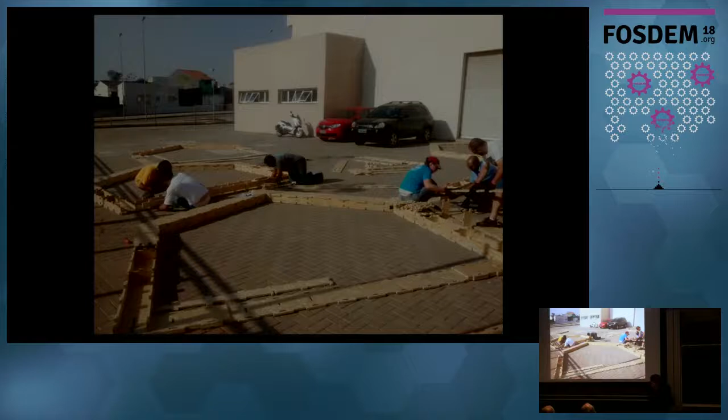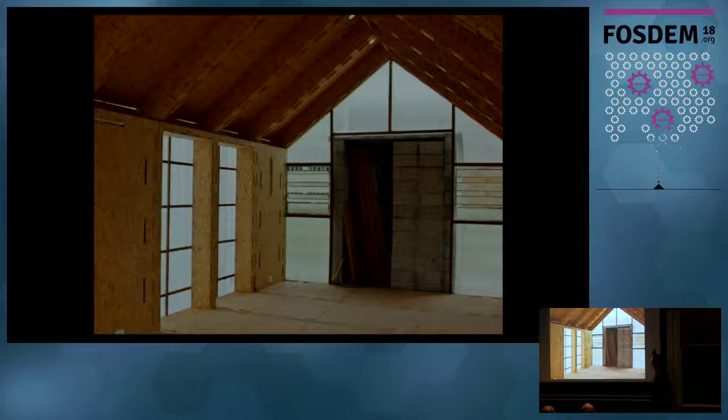This is how it started being built. You begin to build those structures that you see here on the ground, then you put them up, and then you put the parts that bind them together. I will explain all that a little bit later on.

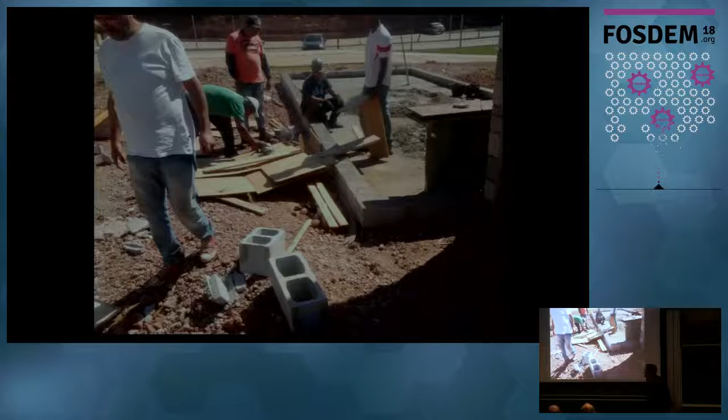So we begin to build like that. This is the base wall that we didn't build ourselves, we just hired a constructor to build these parts that are more traditional construction. That was also one part of the experiment, to have a mixed system with a part built by professional builders and one part built with volunteers, and see how that could work together, how the experience of one could help the other.

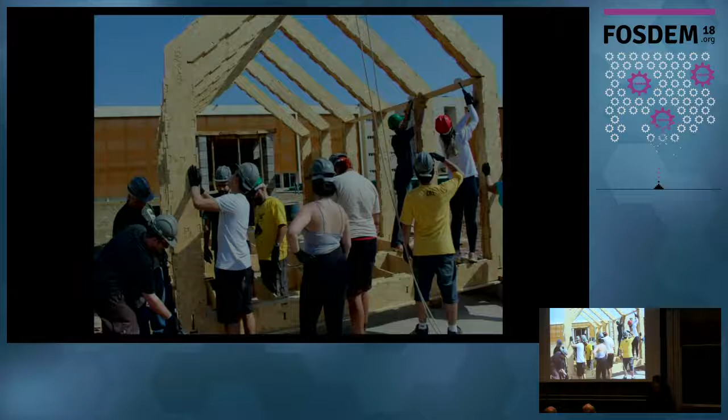And that's the actual building, with everybody hammering crazily. That's really the big part of it. If you look at the result, it's not so impressive, it's just a little house. But the process of it, everybody there who built this thing went out saying, this is the best experience of my life, I actually built a house.

The whole point of the thing is actually to be able to build your own thing. Not so much that the result is so impressive or special, but the fact that you are able to do it with no knowledge at all. Everybody who was there came without any experience, and after 1 hour you are professional. You understood the whole system, and you can teach others how it works because you know it by heart.

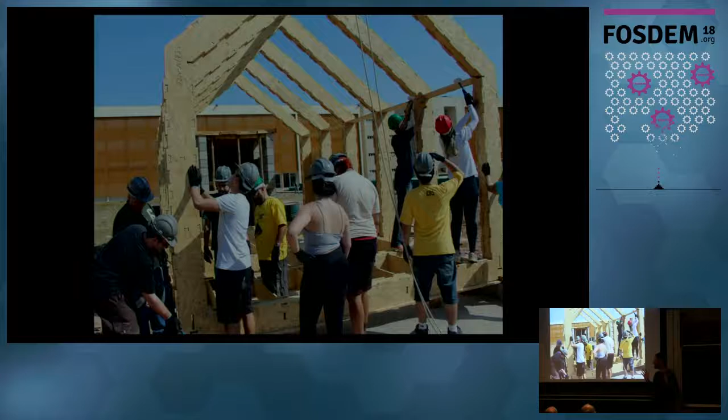Most WikiHouse-based projects - I will explain a bit more about WikiHouse afterwards - most existing WikiHouse projects have been built inside an exhibition, for example, temporary things that were dismounted after 1 or 2 weeks. Now there are like 3 or 4, I think, built to last in the whole world. So this is still experimental, we don't know how long it will hold, but we try to do our best to make it last many years.

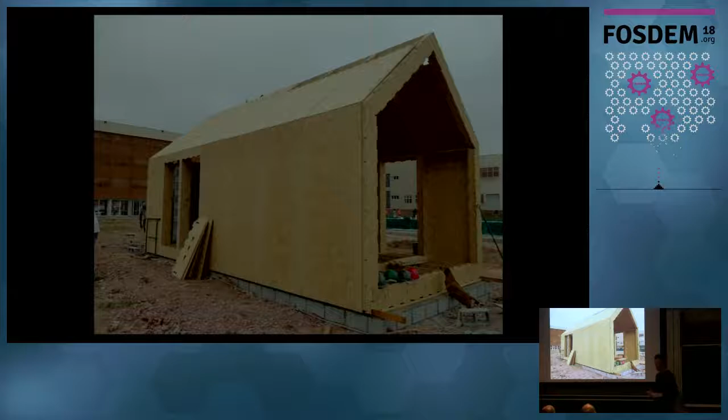So we did a bit more than just - that was a big problem. The construction was slow, we had to protect it from the rain, and we didn't think well about that.

That was one of the biggest problems we met. Since we are in Brazil, we have a very soft climate. Basically, you never have to protect against cold or heat, because we're in the southern part of Brazil where it's never too hot and never too cold. So basically, you can forget about insulation.

I will show afterwards what they used to do in Europe, because the WikiHouse project is from Europe. So they have to be really careful about insulation and not letting any cold or humidity enter, because humidity is terrible for the wood. It cannot take water, otherwise it begins to rot and change shape, and that's terrible.

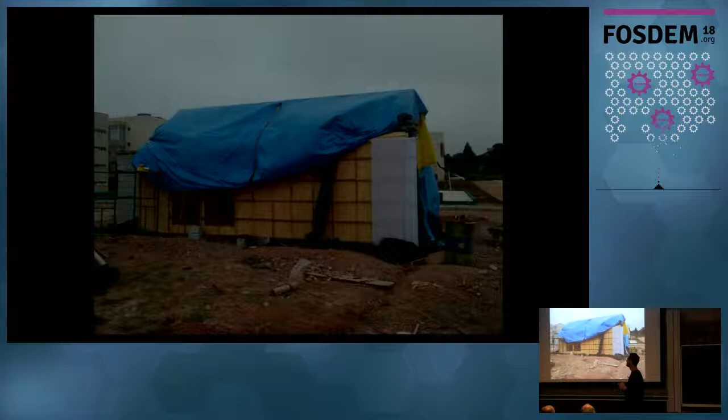But in Brazil we don't have so much of a problem, because the air helps us instead of being an enemy. So instead of cladding it inside a skin, we decided to let it breathe. We use this material, and left a space between it and the wood, so the air could flow all the time, entering below and escaping on top, keeping the wood dry all the time.

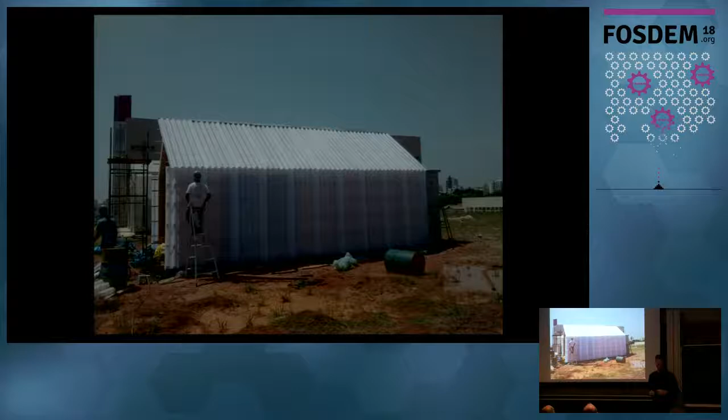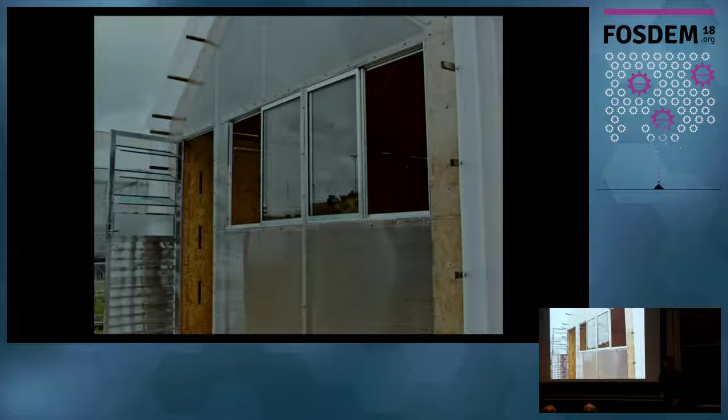This is working quite well, actually. It's all open on the sides, and the air can flow between all the parts of the structure, because we don't have to care much about being tight there—that's not important. If a bit of air gets in, nobody cares. It's even better. So we have a completely different situation than in Europe, and we were able to experiment with these quite interesting air circulation systems. This is the inside.

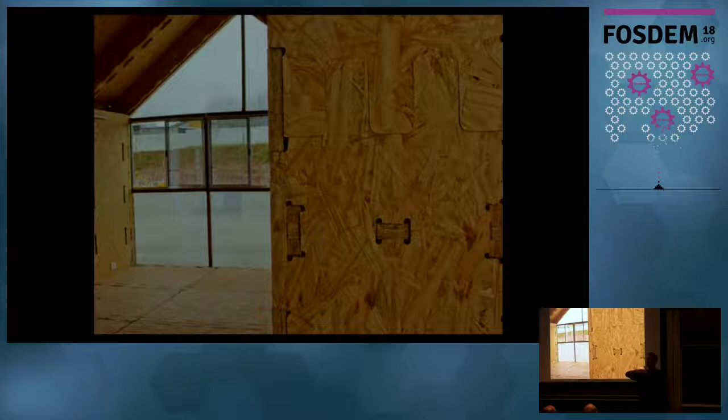You see the details of how the joints are made, and they are really tight. That's the advantage of having this wood cut by a machine—the precision is absolute. You can dimension these things to be just tight enough that you need a hammer to put them in, and once they're in, they're very strong. We did a bit of testing to adjust the calibration of the machine, but the first test was okay, because the precision is built in.

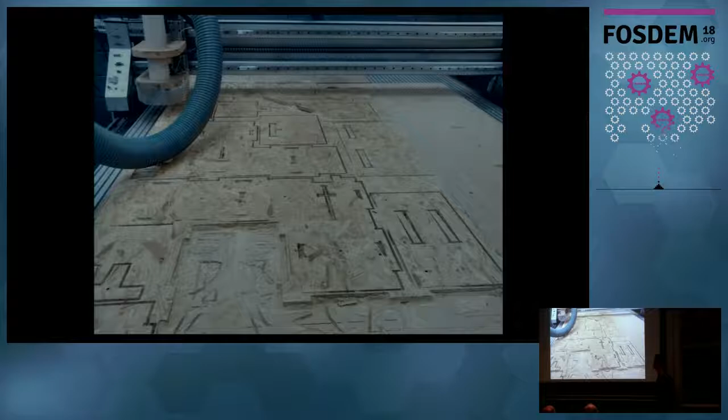So this is what the machine does. It basically comes from your model. That's where FreeCAD enters, which I'll explain now. Basically, your FreeCAD file goes to the machine, more or less. The process is quite straightforward.

And this is the pieces being cut. It's quite a lot of wood. This whole house is like 170 pieces of wood—like 2 piles that size. When it begins to accumulate like that, you really have a problem figuring out where to put them before you use them.

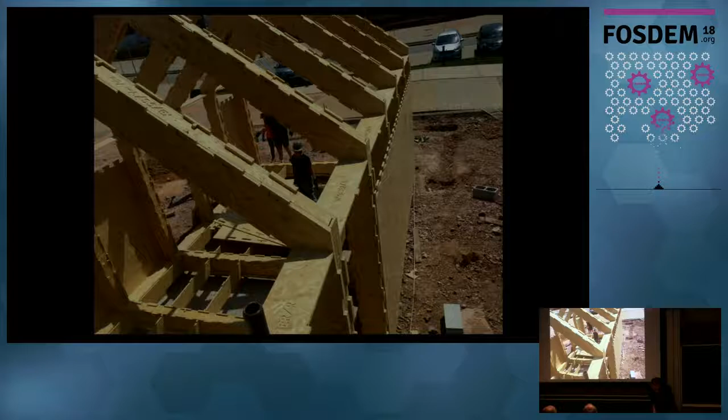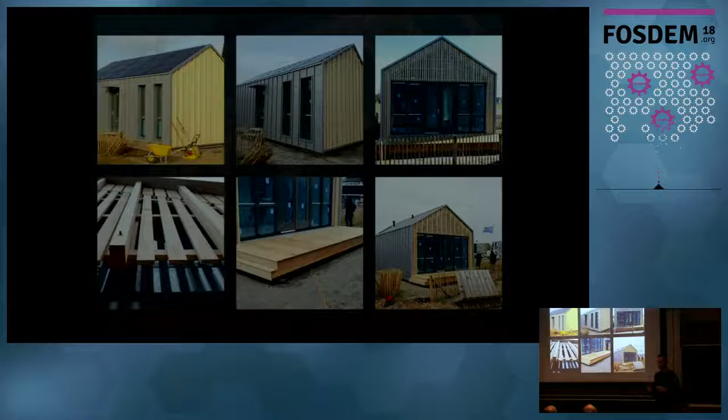A little bit to show you the details—this is another WikiHouse they've been building. They're finishing right now in Almere, near Amsterdam. There was a bit of competition about who would finish first, and we won. But ours is much easier, so that's why we won—we don't have half the complexity they had to cope with here. But if you see, it's exactly the same system, the same shape, and the same problem.

So this is the WikiHouse project that we took our shape and system from. This system was begun in 2011 by two architects in the United Kingdom. They built, I think, above 30 or 40 around the whole world, but those still standing in use—there must be about 4 or 5 now, 2 or 3 in the UK. Now we have one in Brazil, and there's this one in Almere.

It's fully open source. You can just take their files and adapt them like if it was code. It's 3D models and the whole system of how you build it. They have manuals as well, and a lot of resources outside just the files—which are files too, but you understood me.

And it's now well tested. The first ones had lots of defects in how the joints would work, and the whole thing would shift like that. Over the years, a lot of people worked on this, even pretty famous engineers, and the system is now extremely solid.

These columns, as we call them, the main structures, are really impressive once you begin to build them—the more you have, like 3, 4, 5 pieces crossing each other. After 5 pieces are there, it's extremely solid. Everybody looks at that, and you can really hang a lot of weight on them. It's a heavy construction, so it has a lot of stability. You feel that it has matured, and it's become something you can really trust.

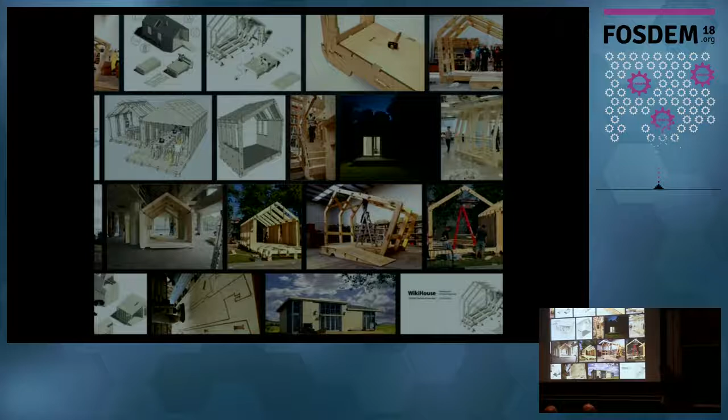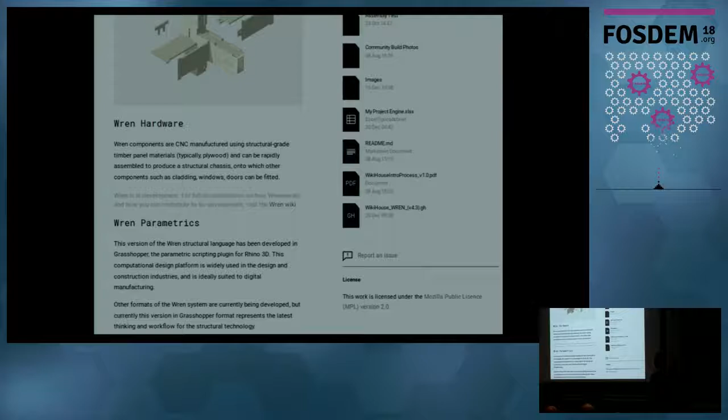That's the kind of stuff you find on the WikiHouse website. You grab their files—all the old ones are based on Sketchup. Those are Sketchup files, but they're now migrating to some scripting system for Rhino, so you could enter the parameters and it would build the 3D model automatically for you. Of course, we try to port that to FreeCAD. That's what's coming now—that's the kind of material you find there.

That's what we used basically without modifying anything, because we didn't want to try anything fancy—we took their base system and tried to do it well. Next time we'll experiment with some stuff, but we really tried to do it the best way we could, so we tried not to modify anything from it. It's basically modular—you make it as long as you want, it's just repetition of modules.

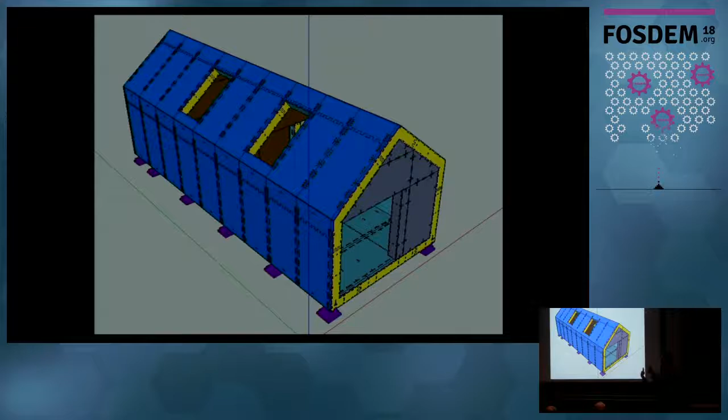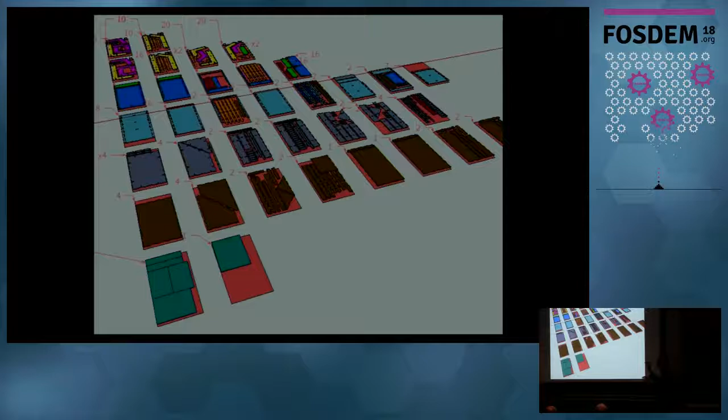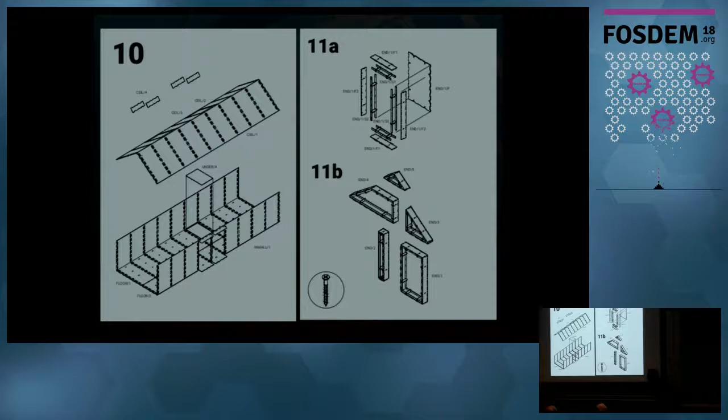In the WikiHouse files, you also find them already separated to be processed into CNC files, G-code files to be used by the CNC machine. So this is all already set up, but we redid that part as well. And then you have mounting manuals—you see that they say you could use some screws.

And so this is FreeCAD. This is the project I've been participating in since it started in 2002. I've been there since 2008, I think.

Yeah, FreeCAD, for who doesn't know it, is basically a 3D modeler, an open source 3D modeler. It's GPL licensed, and its main focus is that it's a technical modeling application. Basically, we used to say it's used to model things that you will build in the real world afterwards—from electronic components to cities, basically. Anything you would need to build afterwards, requiring precise and controlled modeling that you could do and redo. It's generic because, as I was saying, it's multi-purpose. It's used for any kind of stuff, not specially for buildings or for this or for that.

A bit like who knew AutoCAD—that was its strength. AutoCAD was something everybody used: engineers, hobbyists, architects, everybody would use the same software. And that's something that has been lost in the commercial world because they want to specialize, because they want to sell specific solutions for each profession. We like to go back to the old good times with FreeCAD and try to have a kind of application that's just a big generic thing that waits for your creativity to work on it.

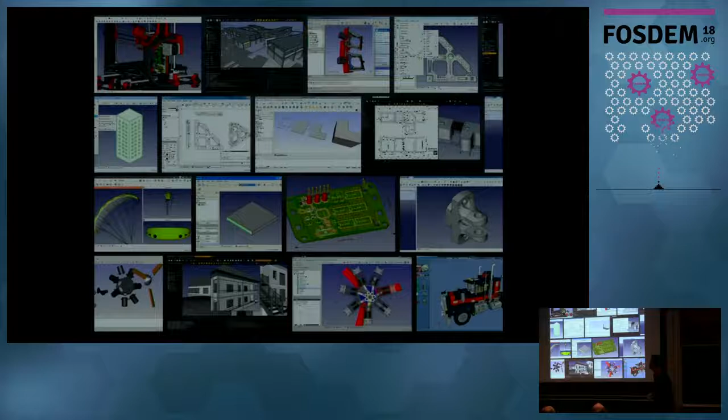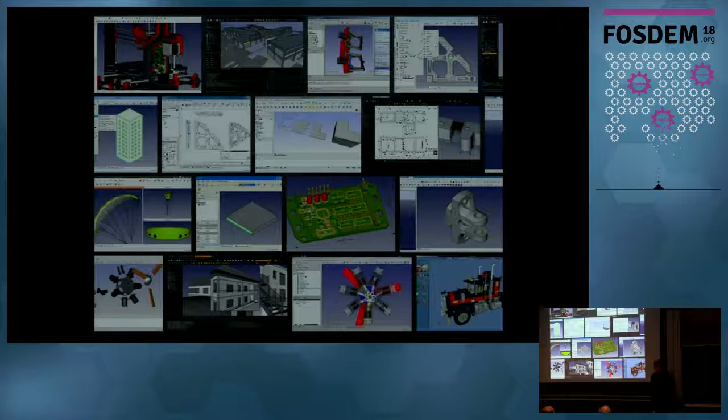And that's the website of FreeCAD. That's FreeCAD basically—for who doesn't know it, it's a pretty common application, like a very standard Qt-based interface with a 3D view and modeling tools. The interface has nothing special. That's the kind of stuff that people do with FreeCAD.

Where is Juan? Here. He did it. This one.

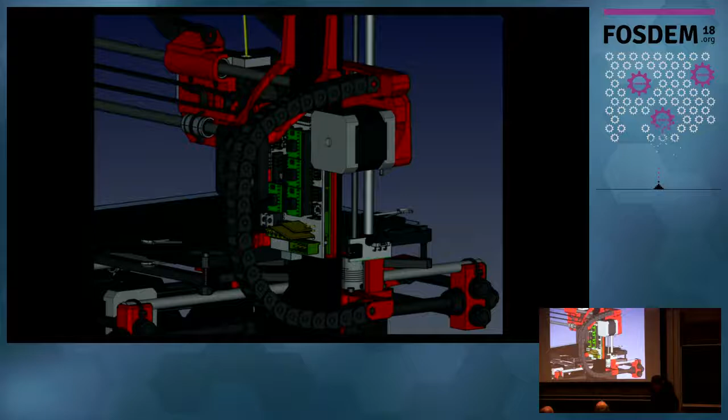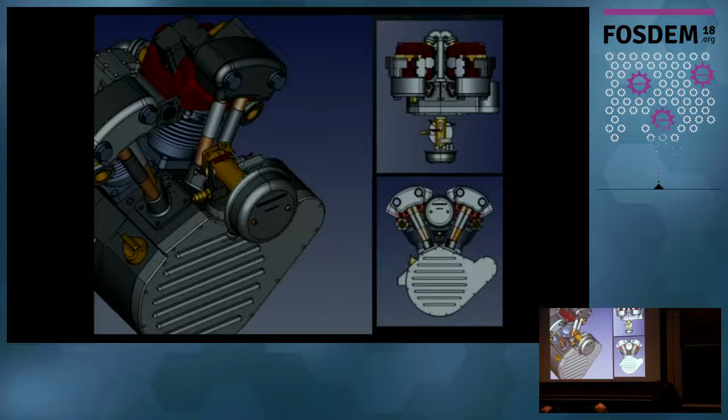That's one of the last ones that appeared on the forum. Yeah, people do kind of crazy stuff with it, and more, and houses as well.

One of the first things we did with this project is convert the SketchUp stuff to FreeCAD. One of the main differences is that SketchUp is based on mesh geometry, which is basically points and triangles. Everything is made of points and triangles.

In FreeCAD, we use BREP geometry, which is basically surfaces. BREP means boundary representation - it means the objects are defined by their boundary surfaces, and these surfaces are basically NURBS surfaces.

Every edge of the surface is a mathematical curve, so you can basically do anything that could be a curve. That means you have extreme control over exactly where your surfaces pass through.

It's a bit the same analogy as bitmap and vector graphics. In vector graphics, you have mathematical definitions of where the points are - if you zoom closer, you still see a perfect line. In bitmap graphics, there are pixels, and if you zoom very close, you see the pixels. It's the same thing.

Mesh geometry is faceted - you already have the location of the points. With BREP geometry, we can recalculate the triangulation anytime, so you don't have any fixed resolution in it.

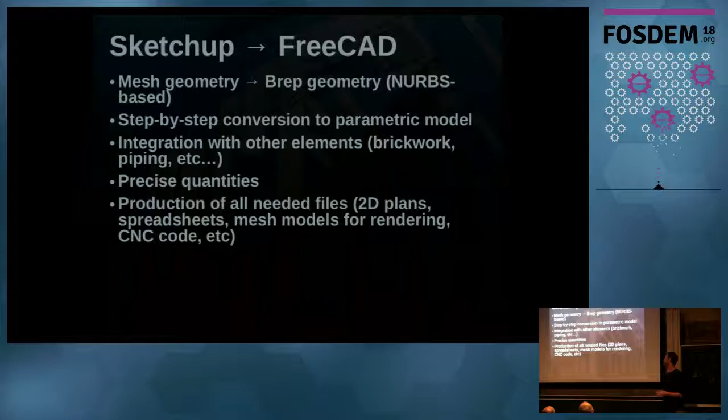That's what we did. Then we had all the integration with other stuff that's not the WikiHouse. And then the fun began - you begin to be able to produce a lot of interesting stuff from your files.

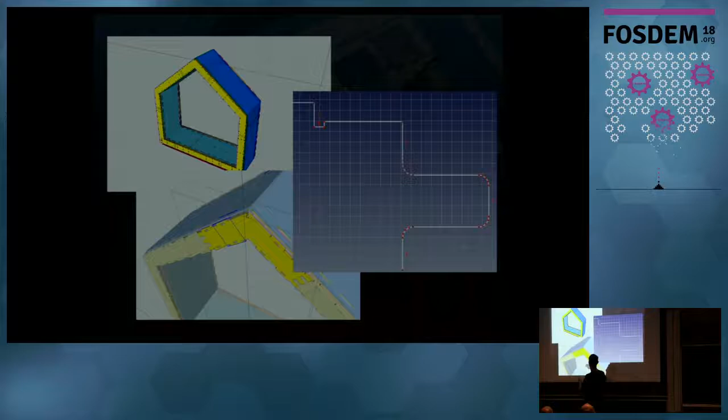So that's basically what happens. You take these SketchUp models, which are like dumb objects, and extract the contour of these shapes, and they become parametric in FreeCAD. You can put dimensions on these and say this must be 20 millimeters, and then you have a parameter - afterwards you can change that to 30 if you want, and you don't need to redraw the shape, it just goes for it.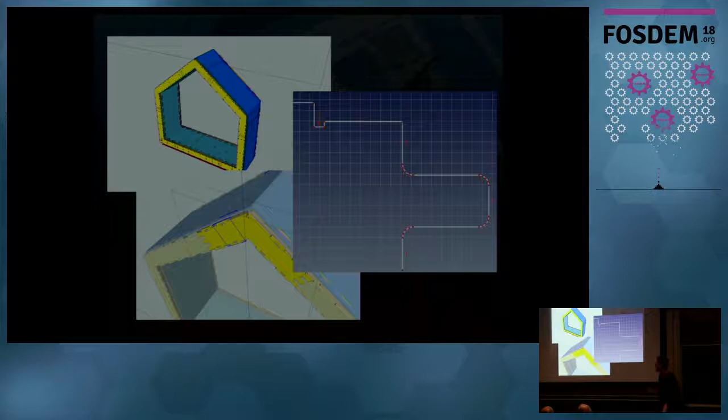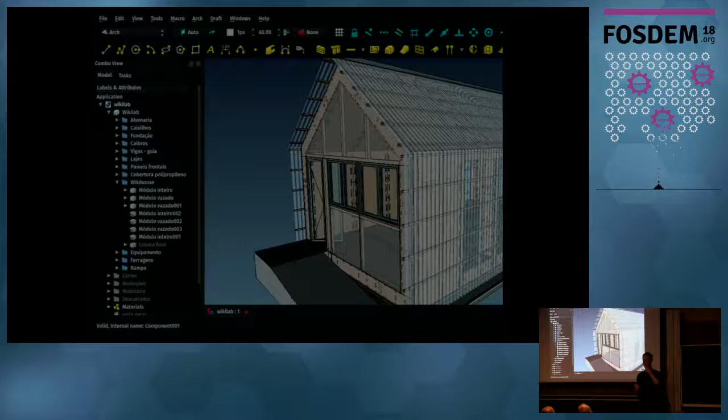All this is really step-by-step work that you don't need to do at once, and you can refine it over time. This is the finished model in FreeCAD with all the rest - it's not only the WikiHouse. One of the good things is that you can organize things really well the way you want, grouping objects by type. Of course it's in Portuguese, but just to get the idea that you can go into pretty complex models and keep something that's really easy for a human to understand how it's organized. That's one of the big points, I think.

This is when you remove the stuff on top of it. It's really the wooden construction, the inside, and all the piping is there. Everything is in the model, basically.

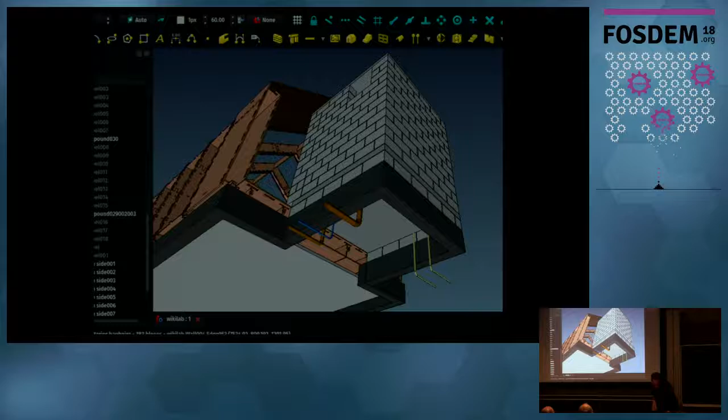It's pretty complete. So we had this model of the whole building, and we had another model that's just one element, and that's the one we used to produce the files for the CNC machine, because it's basically 7 of these modules. We did just one and used the same output seven times.

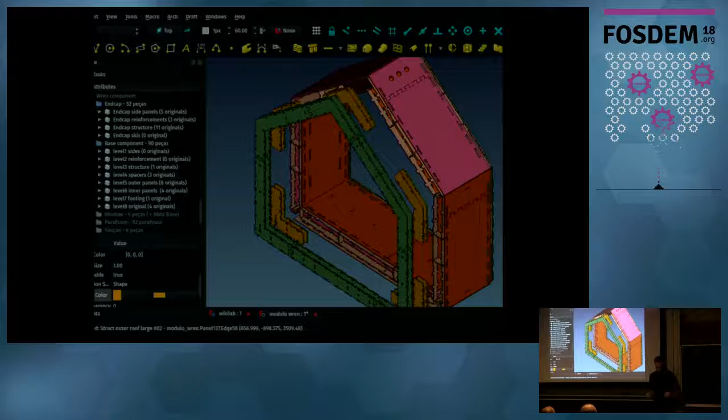It's pretty well organized already from the WikiHouse project. You have these side panels, the inner structure, then the reinforcement, and then the side plates. Everything is already defined and separated in the WikiHouse project. You just have to understand how it works, and it's really amazingly well done.

This is what we end up producing with it - all these things that I will show now that you need to have. Of course, the most beautiful thing about using free software for that kind of experimental stuff is that you end up coding, because you end up adapting it for the special case.

And so we had quite a lot of new FreeCAD code being done thanks to this project as well. That's the kind of 2D plans that you need to get the authorization to build the thing.

In our case, we were on the university grounds, so we had to ask for authorization from all the university instances and stuff. That was the worst part of the whole thing, being able to obtain all those authorizations. So you need these drawings to be able to show them.

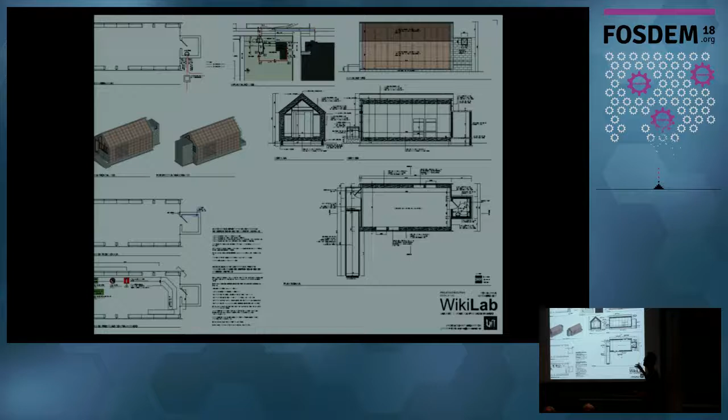That's a distance between the two that we're trying to reduce. The idea, talking the other day with Ton Roosendaal from Blender, is to have a one-button push in FreeCAD that would land in Blender with a preset of lights already on, and you'd have almost a one-button render.

He's really interested in developing this further. So we should be able, for the next time, to reduce that distance needed to produce a nice render. There are also other solutions becoming real-time rendering etc., becoming interesting to use together with FreeCAD, so you could have all the modeling in FreeCAD and just export to another application for the final image.

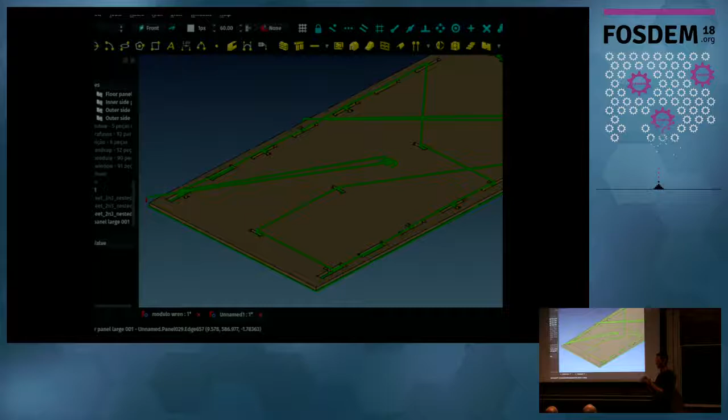This is basically the kind of file that you get from your panels. Once you have all your 3D models, these green lines are the G code. It's basically the path that the head of the machine must walk on the piece to carve it, going up, down, and making the shapes. This is basically G code, the language that most cutting machines in the world, even 3D printers, use. Each machine vendor has a different dialect, so you have to make adaptations depending on the machine, but it's basically the same system.

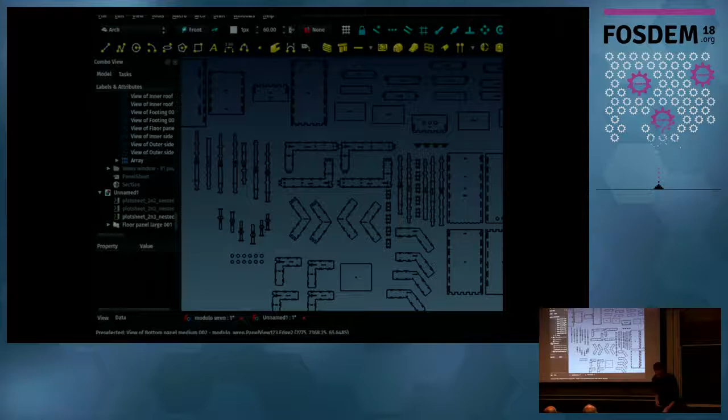In our case, we weren't able, in the first half of last year, to do it all in FreeCAD. So basically what we did is export the 2D shapes of every piece of the model, and then the shop where we did the cut generated the G code from these files. That was about 8 months ago, and a lot has been done in FreeCAD since then that wasn't there at the time, so we had to produce it another way. But now we would be able to do it in FreeCAD if we had to do it today—everything is there to make the G code and export it directly to a file ready to send to the machine.

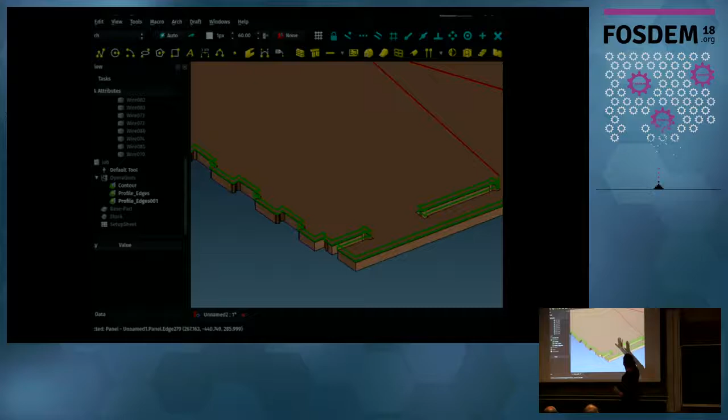Is that computed or is this manual work? It's computed. You still have to, for example, take this face and, let me show you, use the path module.

It's in the next slide, but we have now a lot of tools to take one piece, take the driver face of it, and it would calculate all the paths automatically. That's all the work that has been done last year. There's been a lot of work on the CNC part, and now it's totally possible to take all your panels and from each one generate a cut path automatically. You have a lot of options if the holes have to go before the external profile, if you have to change the order, and that kind of stuff.

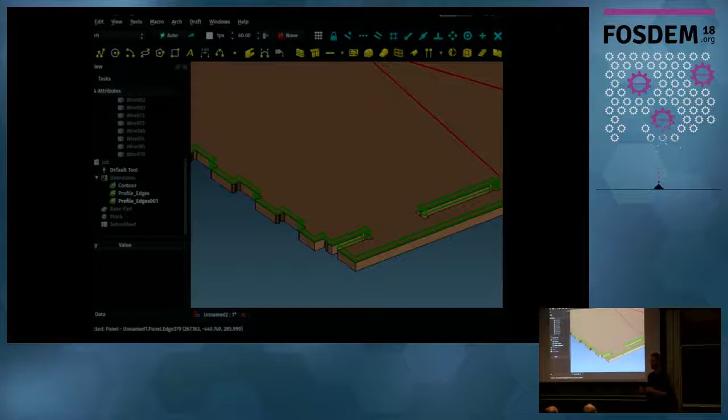It's really becoming cool. That's another tool we've been working on because of this project, a way to gather a lot of pieces and join them in a defined area, which would be your base wooden material, trying to lose as little material as possible.

Is that done by algorithm or by hand? This is done automatically. This interface is basically what you use. That's the new nesting tool. You define the container, you add the shapes in it, and it's still pretty slow because it's new and not very optimized, so it runs like half an hour for something like that. But that will get better over time, we need to optimize it.

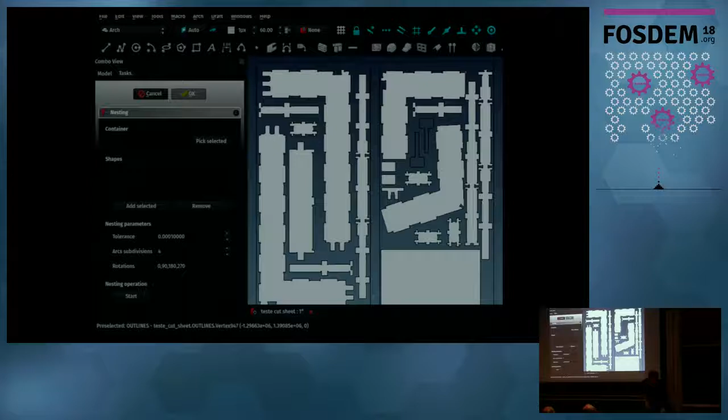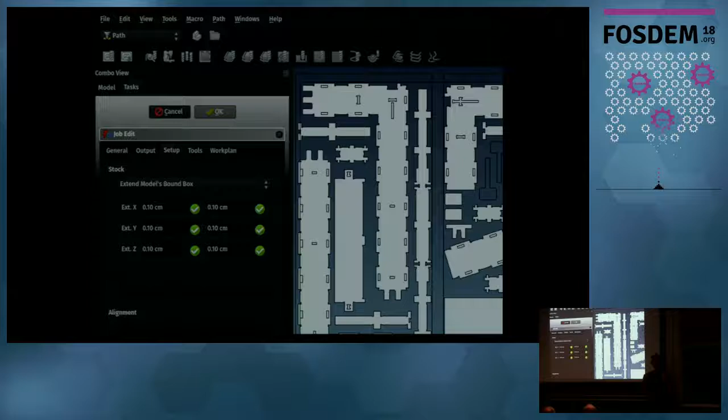But it basically works. That's the new path workbench, and you see it already has quite a lot of tools. Basically now it works pretty much like you define a project, a cutting project. That's the interface here. You define your base, the size of your base material, where the start point of the head of your machine is, and then it goes to fill this up.

This is a typical path job, so you have a lot of setup to do. But then you just add stuff, add operations one after the other, and the machine will do one after the other.

Does it only work for cutting or also for 3D? At the moment it works only for cutting, because most of the people who worked on this are doing cutting work. But it's exactly the same language that would go for a 3D printer. Only the thinking is different, because you're not cutting, you're adding material. So probably we'll need to think a bit about it, maybe some operations need to be thought the other way, but the whole process and the file that comes out of this should be the same.

All the big hard part is done. It would probably be a matter of testing and trying to find what needs to be inverted. Have optimization for running dry, less movements without cutting? It's being worked on.

There's already a lot done. Like a month ago there was a big change in the order you do things: first you do the contour, then you do each hole, and some guy coded something to calculate the distance between the holes to reduce that drastically, because it was done by position before, and now it's done by the distance between the holes. So there's a lot of possible optimization to do, and it's long-term work, but it's totally being done right now.

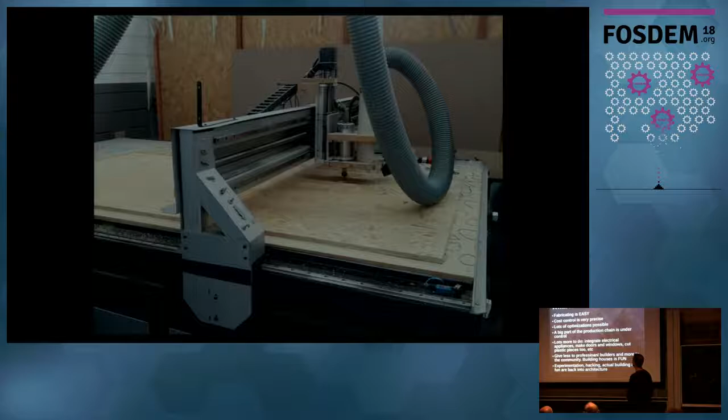Basically, this is what we learned from the whole experience of this project: that it's really easy to fabricate. Architects - I'm an architect by trade, I'm not a programmer, I went into this on my own - but architects are not used to touching fabrication, they just buy stuff that already exists. It's totally a new area we can enter by using this kind of hybrid space between fabrication and architecture, and there's a whole world that's not really explored, and it's much easier than what us architects would think, most of us would think.

And cost control becomes very precise because you have a lot of data to work with. I won't read all that stuff, but there is a lot of experimentation and learning to come from this. And that's it, how we will...

I guess maybe there are some remaining questions, but there were quite a lot of questions already during the talk. So let's get 3 questions.

Many professional building software can import via formats - in the Netherlands you have Stabu, which is a format of specifications. Do you support exporting to those kinds of formats so that existing building tools can also analyze and work with this?